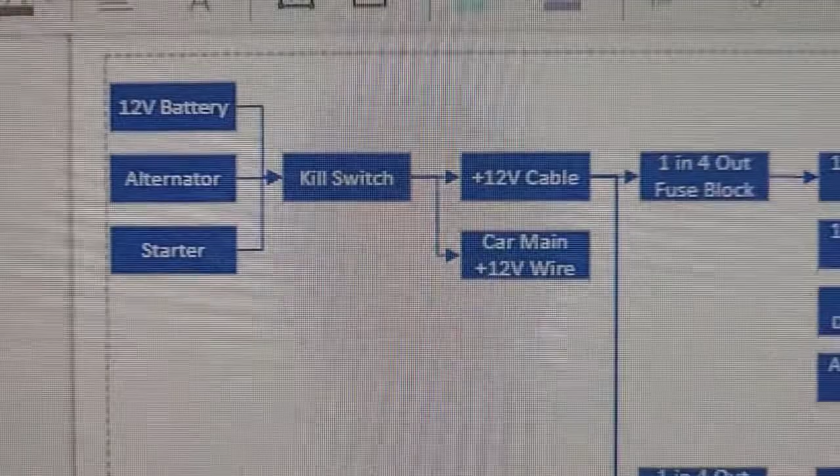Hey guys, welcome back. So this is a Visio document I made probably a couple months ago, planning out the electrical for my car. It's pretty advanced. And the reason I'm showing you this is we've changed it all now, but this is what we were planning to do.

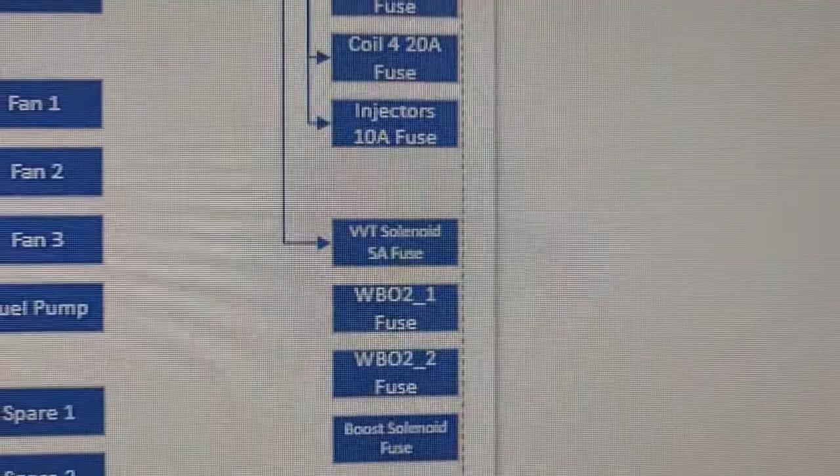Just to give you an idea, if you zoom out, you can see there's a lot of stuff involved. When you get to the right, you'll notice like ECU, coils and injectors, VVT, O2s, and it just goes on and on. There's a lot of stuff here, a lot of stuff here too. These are running fuel pumps, fans, some spares. Anyway, quite a bit of stuff.

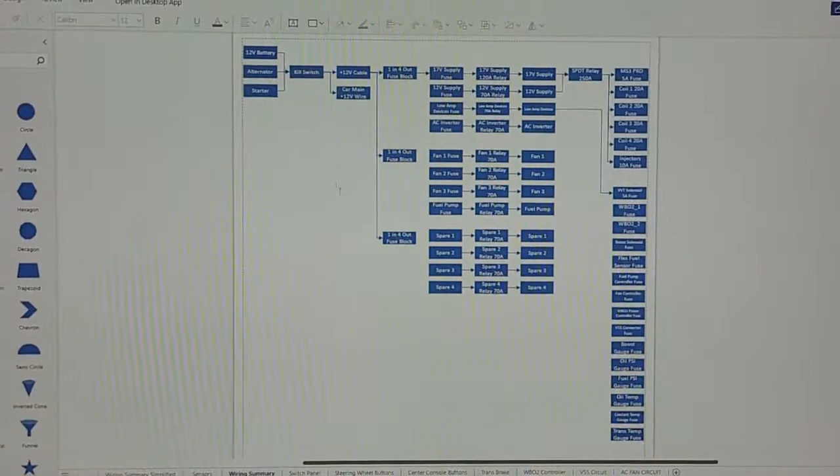I want to show you where we're at now, because this was when I was trying to build the car to be a race car, this is what it looked like. I just wanted to do the A-B comparison. So this is what it looks like now. Here's the before, here's the after. Look at the difference. Obviously way less stuff.

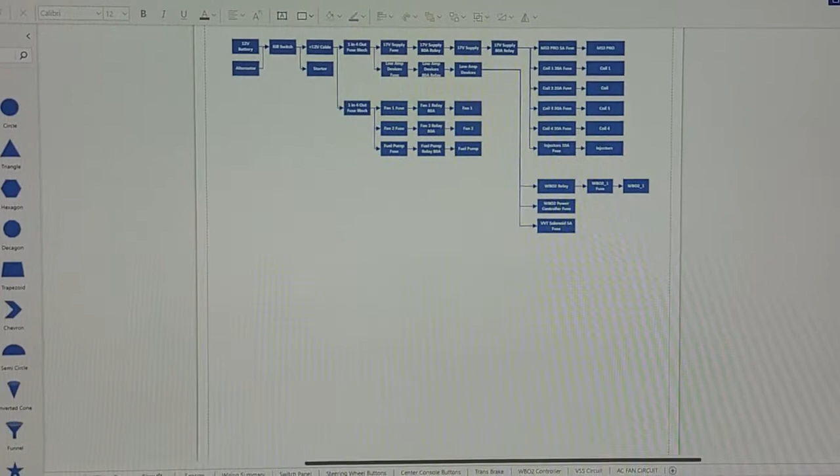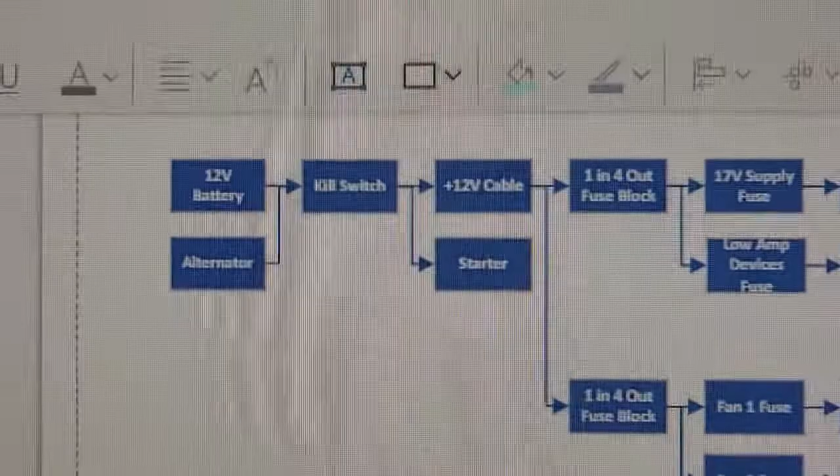So you'll see there's a few changes. The battery and alternator are tied together, and that goes through a kill switch. The reason for this is if you kill the kill switch, even if the alternator is charging the battery, there will be no power going to the car, so everything will die. Then we've got one going to the starter, another wire going to a couple of fuse blocks.

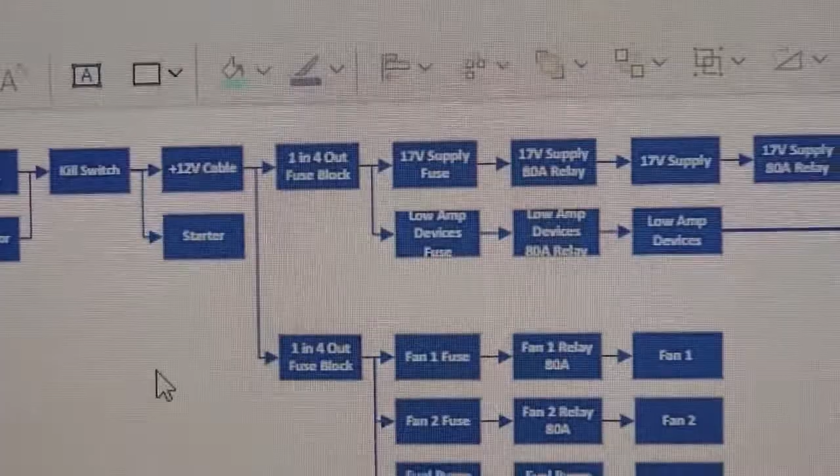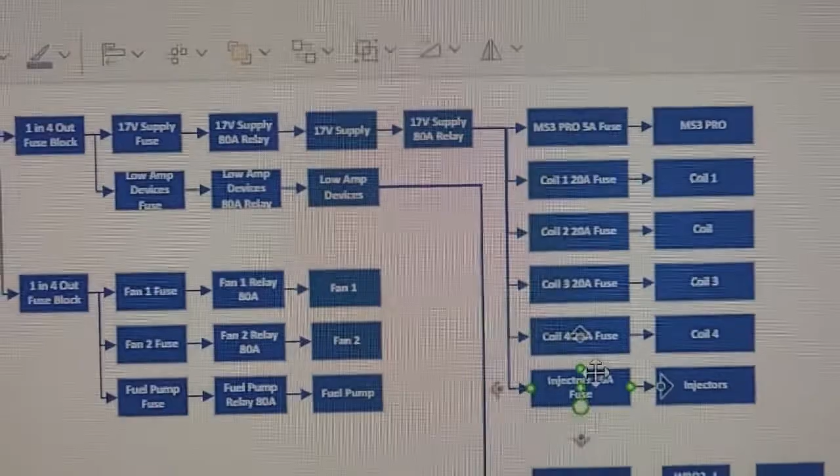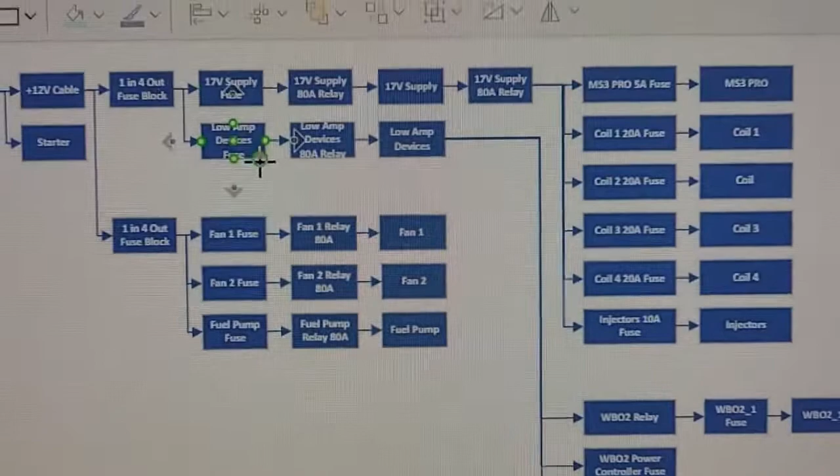We can see up here we've got a 17-volt supply. Basically all this stuff on the right is going to run on a constant 17 volts, so I'm going to build a 17-volt supply for this. If for some reason that doesn't work, we'll just run it on battery voltage, but I expect this will work. After that we have low amp devices, which steps down. That's basically just the wideband and VVT at this point. I think I'm missing the idle valve, might have to throw that in there.

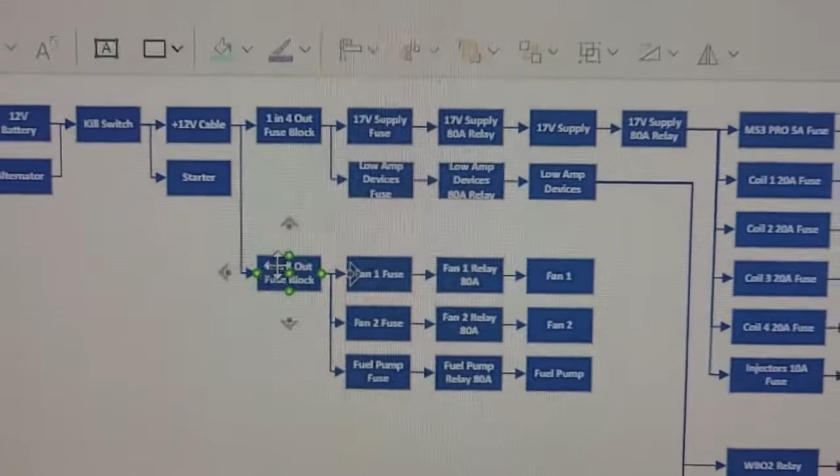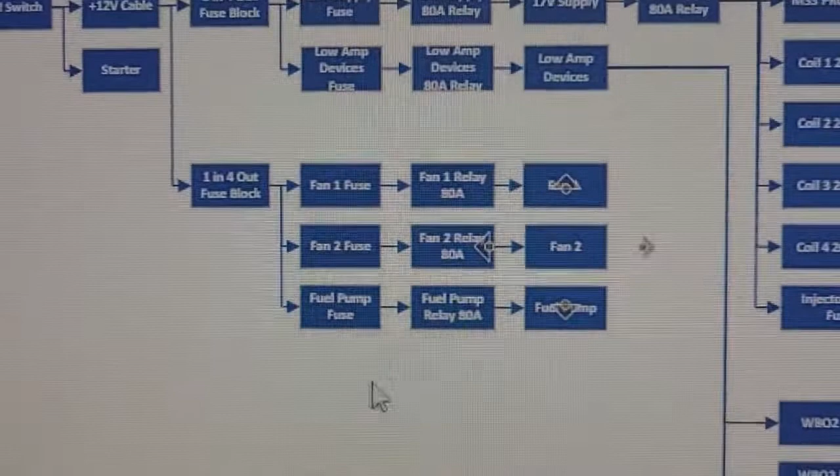This actually has 4 spots, but I deleted some stuff, so we only used 2, so I dropped down to this one. We had 3 fans, we're down to 2, one for the engine and one for the trans cooler. And then we got the fuel pump. That's it, pretty simple.

Now we're not finished. Basically we just kind of took off stuff and simplified it. What we do have to do is put the entire car on here now. We really don't need much, but we're going to need a couple things. I think we need brake lights, headlights, a couple things like that, but it's not a street car, so we don't need much.

I said we need an ignition switch, but maybe we don't. Probably need a starter button just to start the car, and throw some switches on the dash to do ignition and fuel and stuff, which I kind of wanted to do anyway. So we should be able to get rid of the key switch, and all of that stuff on the steering column should come off. So it should be cool.

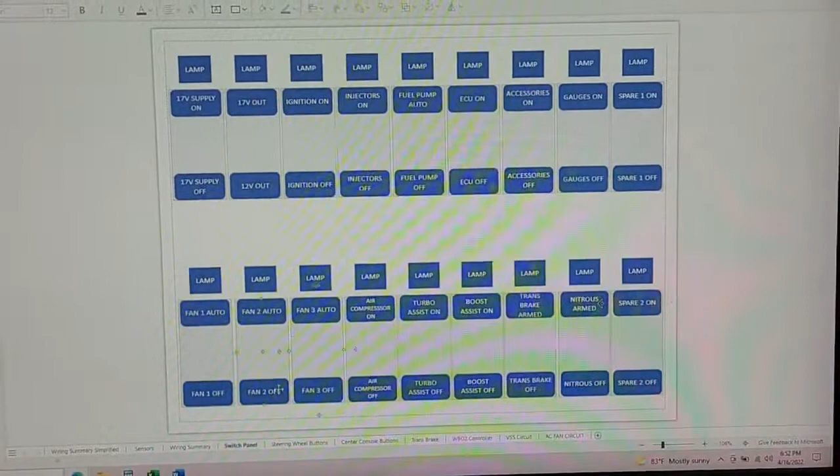But I just figured I'd show you this. We had all this stuff planned out. I recorded videos, but they're kind of boring, and it's all out of date anyway. This was like a previous switch panel, so you can see just a ton of switches and lights. I'm not sure how much of this is staying or not staying, but it's definitely going to be simplified.

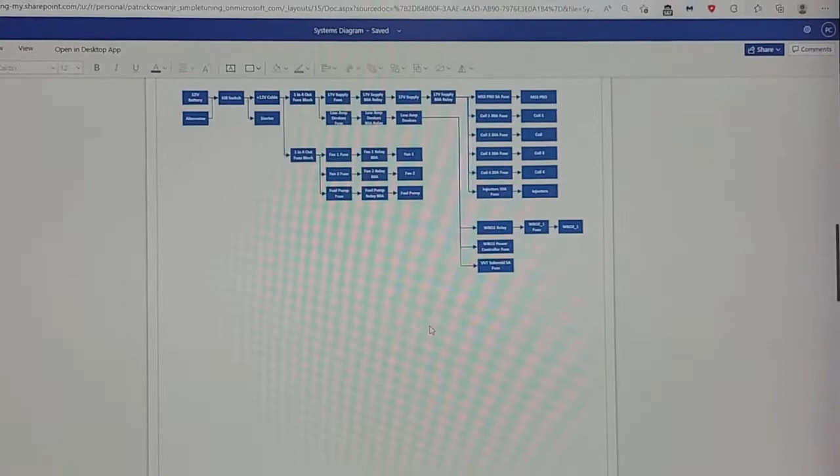There's some stuff for the steering wheel, center console, trans brake, wideband O2 controller. This I don't even need anymore. Don't need that.

So, one thing you might notice, or maybe you won't, but I'll just go ahead and say it: I think we're gonna delete the AC. It hurts, it pains me. Maybe it'll come back in some flavor in the future, but I'm really leaning towards race car. I don't know the exact number, but it's gotta be like 30 pounds coming out of the car getting rid of the AC. It's a lot, and it's all in the front of the car. So we kind of have to do it, and we'll get over it.

One of the cool things is the only thing left on the front of the motor at this point, I think, is the alternator and the water pump, which maybe in the future will change, but for now we're not changing that.

Kind of cool, electrical's getting, when I get done, it's gonna be much simpler. We already took the old harness out, so there's so much less stuff. And what we put back, like I said, it's all going to be minimalistic. So looking forward to that. I've always liked having clean wiring, I've never had clean wiring if I'm being honest, it's never been clean in my opinion. But we're going to try to do it this time, so I'm looking forward to that improvement.

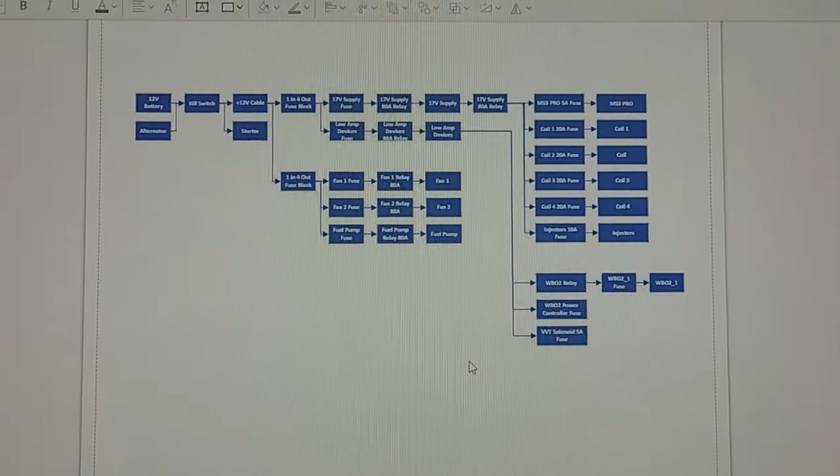Anyway, I guess this is going to be a short one. Wiring is kind of a boring subject anyway, so I don't think a 20-minute long video does anybody any good. But we're going to get this stuff figured out, plan it out, get some parts ordered, and we'll get this thing built. I'll definitely have better videos when we're actually building this stuff. It's going to be nice.

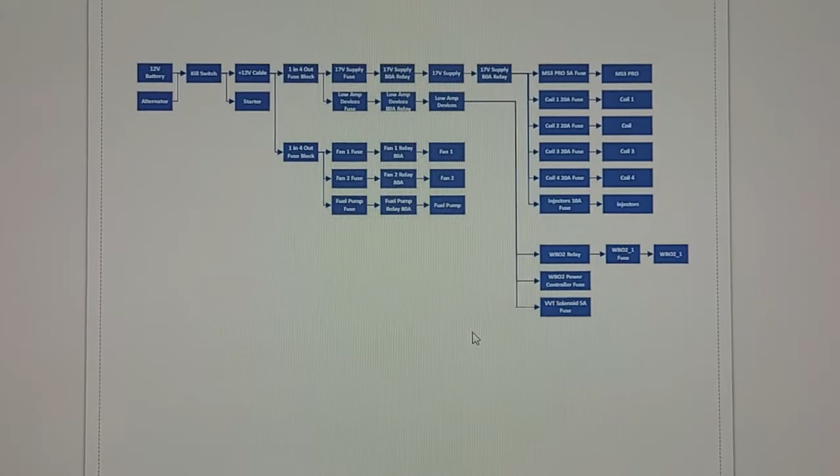I will throw this in at the end: we're going to try to do very high quality work. So we're talking like mil-spec wire, good heat shrink, things like that. We're gonna try to do our best to make this pretty reliable and pretty professional. We're not gonna spend $10,000 on a wiring harness, but we'll probably spend $2,000 wiring the car up, so it'll be decent. We're going for that 80-20, but we want it to look nice.